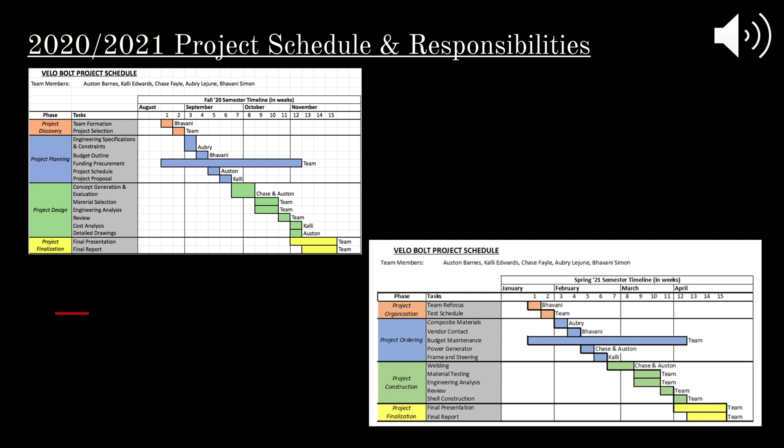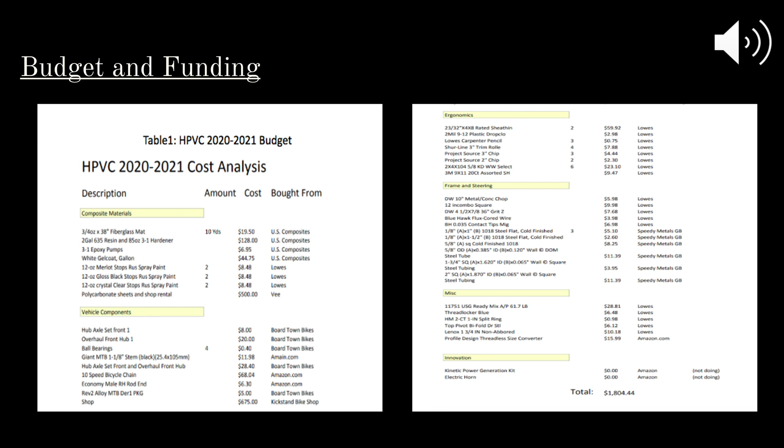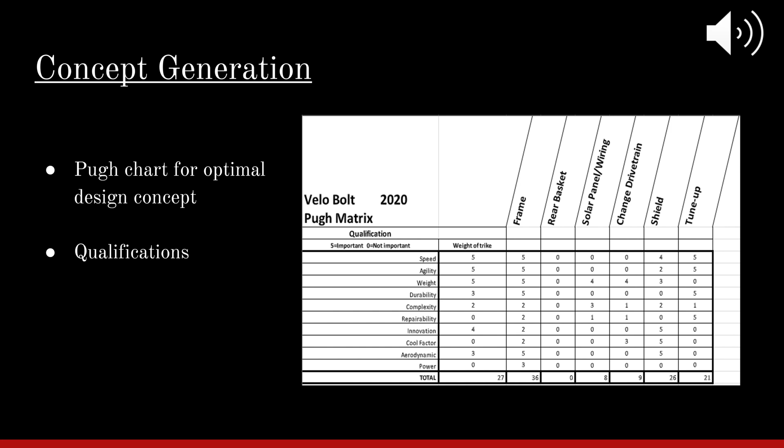This is our concept generation for 2020. We used a decision matrix to determine our priorities for our bike. So you can see we used the frame, rear basket, solar panel and wiring, the change drivetrain, the shield, and the tune-up for our factors. And then the qualifications, you can see we had a few, such as speed, agility, weight, durability, complexity. And you can see from the total at the bottom with the numbers, basically our main priorities that we decided to work on for both semesters.

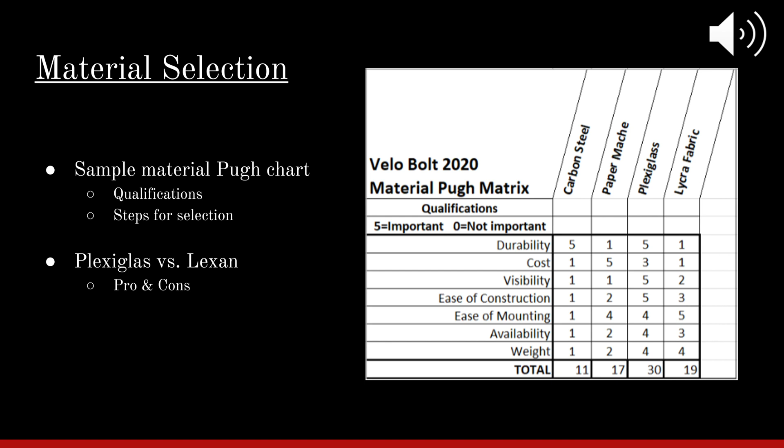Along with our concept generation, our team worked together on the material selection for our shell. Material is an extremely important factor in the success of any project. There were a lot of characteristics you have to consider, but our main priorities were durability, cost, visibility, ease of construction and mounting, availability, and weight. Although all of these are factored in, durability, cost, and weight were our main priorities. And while plexiglass looks like the best option, after further research, we decided to go with Lexan, which is a polycarbonate material instead of an acrylic material. It was our best option cost-wise, and it also gave us great visibility and durability.

Safety is the main priority in any project that you work on. For our bike, we had specific safety requirements for the competition, and a few of them were we had to come to a complete stop from a speed of 25 kilometers per hour within a distance of 6 meters, which is 19.7 feet. We had to turn within an 8-meter radius, which is 26.2 feet, and then travel for 30 meters in a straight line at a speed of 5 to 8 kilometers per hour, exhibiting stability.

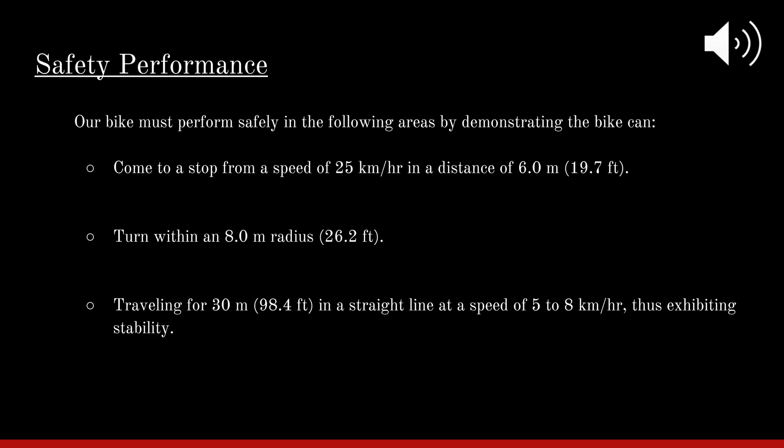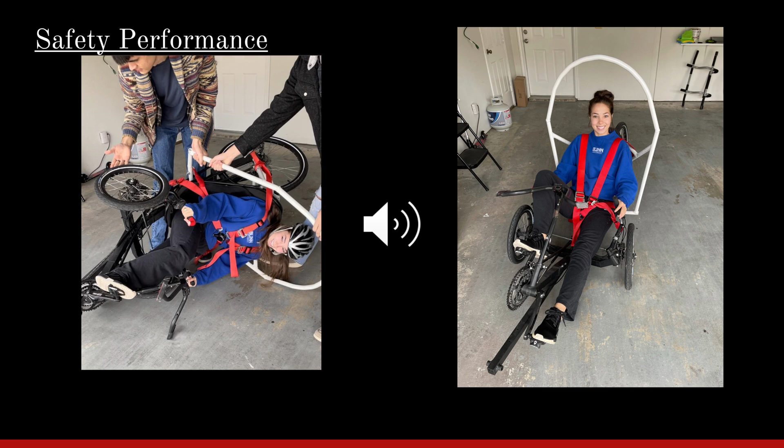So also along with the safety requirements for our vehicle, we were required to ensure during a collision or tip-over event that our drivers remained in the vehicle without any body parts touching the ground. So you can see demonstrated in these pictures, our safety harness did a really good job of keeping us safe and in our bicycle.

Provided are the models of the roll bar using a top load of 2,670 newtons, 12 degrees from the vertical, and a side load of 1,330 newtons at shoulder height. The top loading yielded a deflection of 1.26 centimeters, and the side loading yielded a deflection of 0.98 centimeters, which means we successfully meet the ASME standards for this competition.

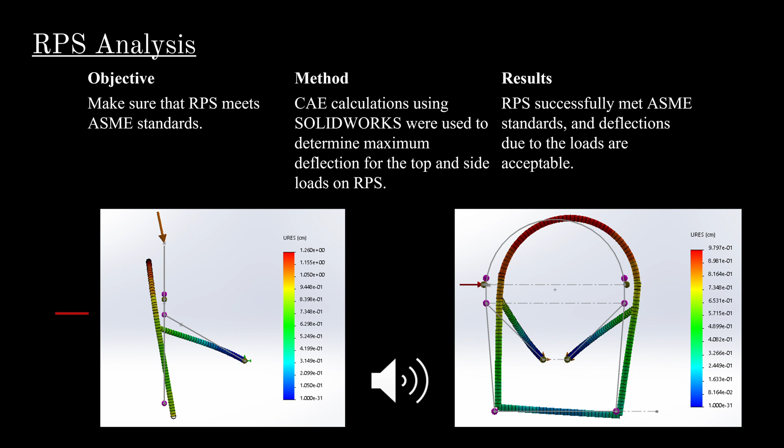Another analysis performed was on the steering system. We used the Ackermann steering calculations, which used physical dimensions such as frame length, wheelbase width, and turn angle to find the turning radius, which is within competition specifications.

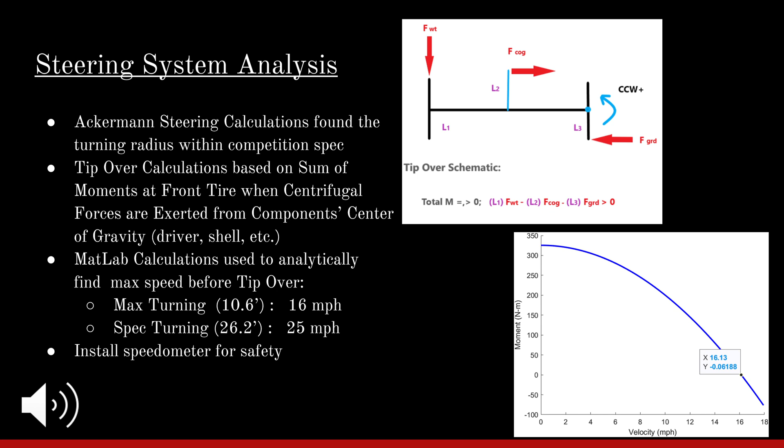The tip-over calculations were based on the sum of moments at the front tire when the centrifugal forces are exerted from the center of gravity. MATLAB calculations were used for the formulas of the sum of moments, force values, and the center of gravity to analytically find the max speed before tip-over. For safety purposes, a speedometer should be used for the driver to judge turns.

The next analysis performed was over the gearing system. To start the analysis, our drivers were put through various physical tests to determine high-end and low-end rider cadence. 100 RPM was chosen as the high-end cadence, and 70 RPM was chosen for the low-end cadence. The gearing for the analysis is a 3-sprocket chain ring with a 9-speed rear wheel.

The table shows selected gearing ratios and cadences with resulting speed outputs. Our max speed under peak driving conditions is a suitable 27.97 miles per hour. This max speed fared well in our competition, leaving us plenty of low-end gearing for fast acceleration and low-end speed driving.

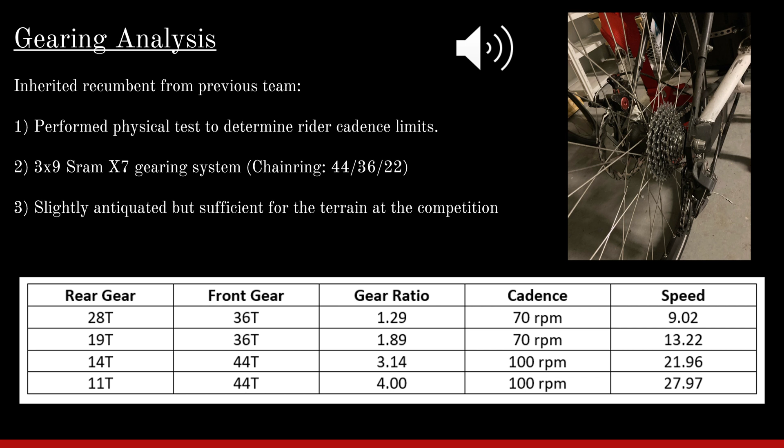Once we decided on a material for the shell, we built a model and ran simulations in SolidWorks. Our focus was where to attach the shell to lessen vibration. As you can see from these photos, when only attached to the top and the bottom with a 15-mile-per-hour headwind, there's a great deal of vibration. This will lower our aerodynamics, distort visibility, and potentially put the driver in danger if the material were to shatter.

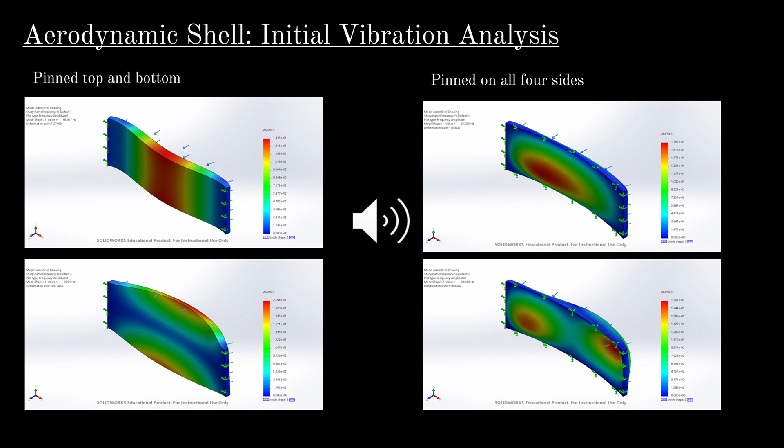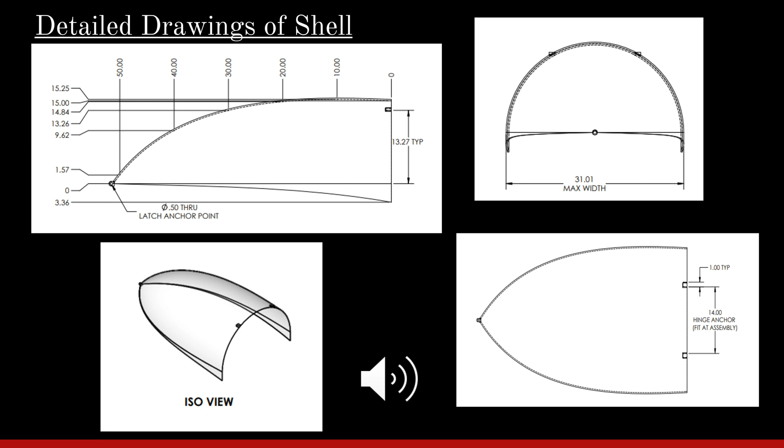So we chose to attach the shell on all 4 sides to increase our aerodynamics and the overall safety of our bike. These are updated detailed drawings of our official design of our aerodynamic shell. And here is where we completed our HPV model in SolidWorks with the complete model of our shell and frame for our bike.

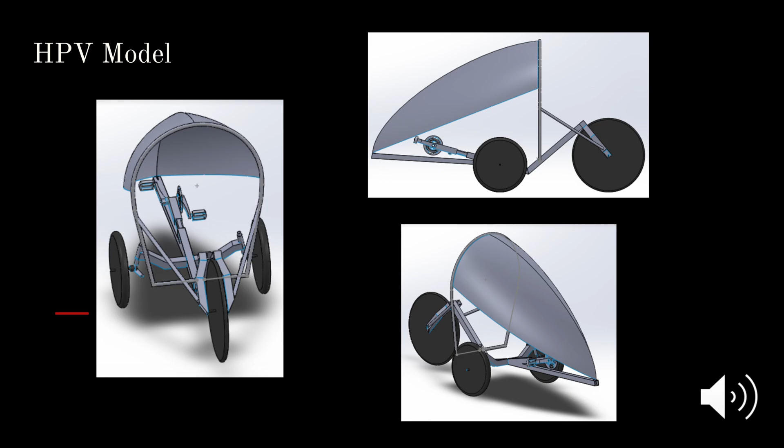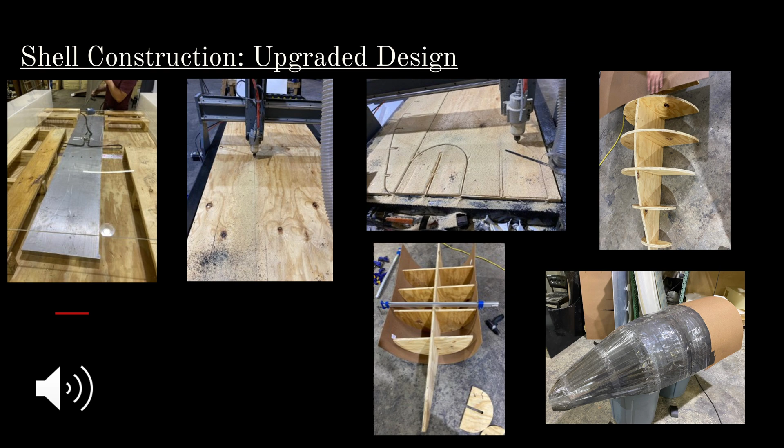These pictures show the steps that were taken to do our mold design that will be later discussed. As you can see in this picture, this is our first failed attempt of our shell. A few things that went wrong with this is we misjudged heating an entire sheet of polycarbonate all at one time. We miscalculated the heat loss during the transfer to form. This heated in a heat sink for 5 hours. And then we also had problematic transfer of shell to the mold.

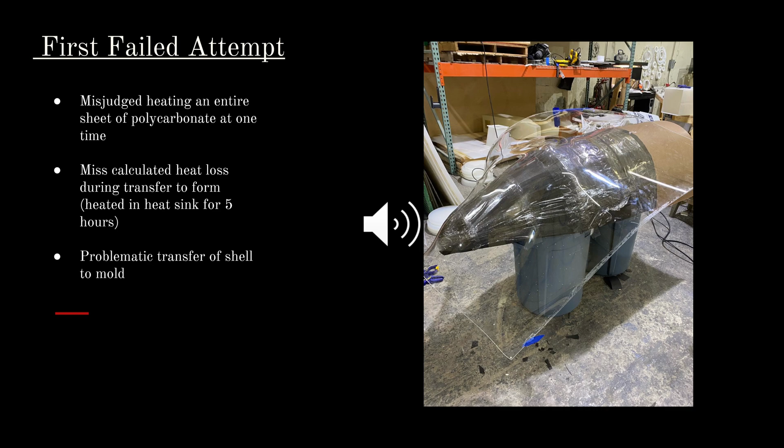We then placed the mold in the oven, which was required to be heat soaked for several hours. The optimum temp is between 210 and 220 Fahrenheit until the mold was soft and formable. Once the mold was done, we allowed it to cool for several hours. We then welded 1/2-inch blocks of glass to the nose and rear rim, which increases the thickness to support the bolts and brackets. After that, we drilled and bolted the hinges on the rear and a latch on the nose, and then assembled our roll bar to the nose of the bike frame.